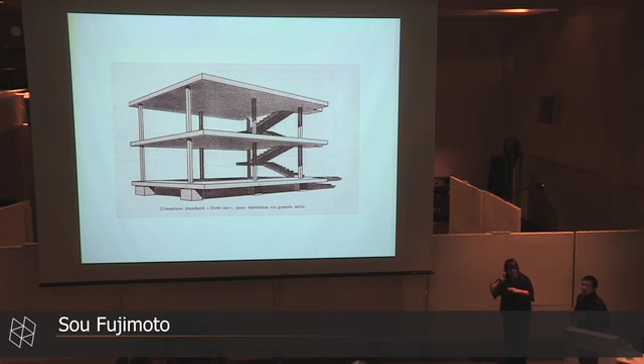And then, what is the cave? I like to say cave is a space not designed for people, so it is completely opposite. Because the cave has existed before people, it is just a natural created landscape, with no relationship with people or human body. That is a big difference.

But I think it is much more creative to live in the cave. When you enter the cave, at first you will be very embarrassed, but then gradually you will find some kind of bigger space, cozy space, this kind of landscape, and you will find your comfortable space, or a place to put things, or somewhere to sit. Gradually you will have a nice relationship between your body and the space.

It's really a creative thing to find a space or get inspiration from the landscape and innovate the function in it. So I think the nest is, in a sense, not innocent. The cave is more innocent. If you are in the cave, you will find a new relationship between the space and your body, and that is really exciting.

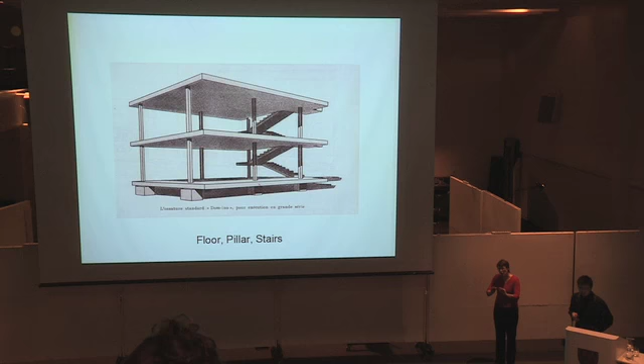On the contrary, in this project, you can see, for example, this is like a floor, but other people come and say this is not the floor, this is a bench, or this is stairs, or this is a chair, a table, something like that. So you cannot say definitively what it is or what it is not. I mean, the meanings of all the slabs are melting together to create some blurring. And then the meaning, if you react to this landscape, the meaning comes. And then other people come, and a different meaning comes.

So no clear definitions, no clear divisions, but these blurring landscape-like things. The only thing we can see is when we react to the space, then some specific functions or things emerge. So everything depends on the relationship between the space and the body. It's clearly different from the pre-defining system of modern architecture—it's a post-defining or no-defining approach. Such a contrast between this project and modern architecture.

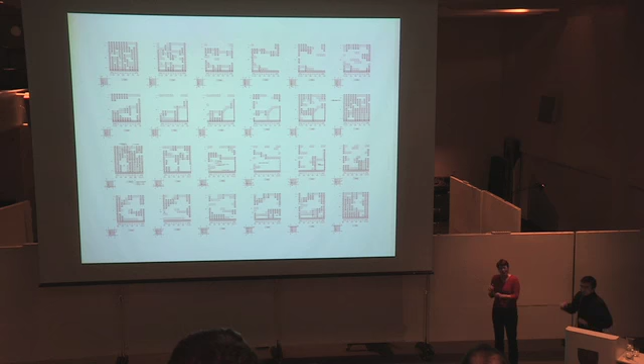But of course, we had to draw many drawings to realize this house. This is about a 4.2 by 4.2 meter house, but we had to draw 12 sections and another 12 sections and 12 plans. It's kind of like a high-rise building, but really small.

And the tricky chairs—you can use the whole space, or not even the space, but the steps, the areas, according to your feelings, or according to how many people you have: alone, with 2 or 3, or much more.

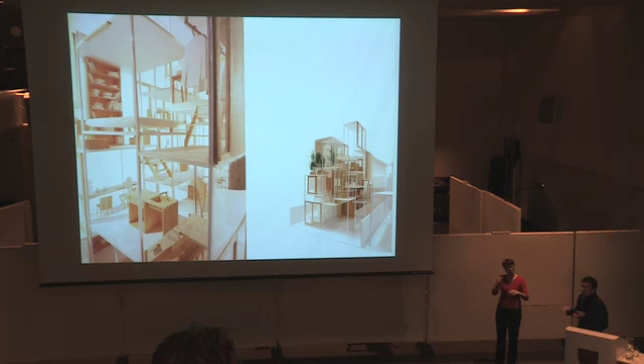So each space is not completely divided—you can sit on it to join the next space, or you can feel the whole space as one room, but at the same time, each furniture-like slab or floor is your own room. So you have many, many rooms, but at the same time, only one room.

We made many, many models. This looks like a huge house, but it's only one house. You will see, of course this is furniture, but this is a slab, and this is another slab. This is furniture. So here, the furniture and the architecture are now melting together.

Of course, you can use the chairs or sofas, but at the same time, you can use the slabs, the edge of the slabs, as the benches or sofas, or something like that.

The client really liked this house, but at the first meeting he said he and his wife are living like nomads in his house. So I got inspiration, of course, from Toyo Ito's Nomad House, but I thought I could make some kind of nomadic house, living like a nomad within a small house. So we can provide many different areas, many different relationships, and they can select their areas as they like, depending on their feelings or the situation.

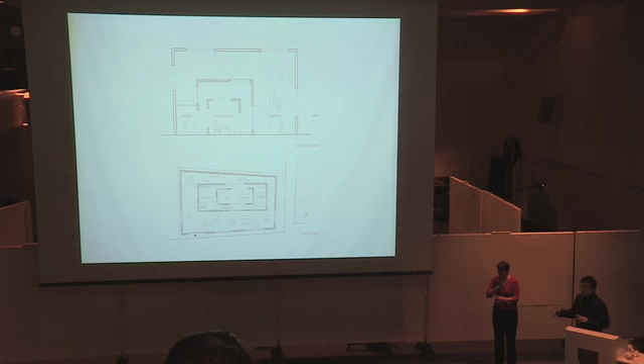And this is the size of the site. So it's a kind of an inverse of thinking or planning to make a huge box on the site, or to make a house, but including that house and garden, another box, another big box is covering everything.

Then it is realized. You can see the surroundings is the usual Japanese typical housing area with 2-story houses, and these houses are not so old, maybe 20 years old or something like that. So it is really a strange urbanscape in Japan.

And then this is my house. It looks so strange in these surroundings. But I like to say the surroundings is so strange, because it is, how to say, no design, but just usual houses. But I have to say, of course, this house looks very big, but not just a huge disturbing house from the street.

This big box is of course very big, but it has many, many openings. And the inside of this big box is outside. Then, as a result, you can see through this house to the skies behind, or you can see through this house to the neighbor's house behind. So it is a kind of translucent, or semi-transparent house or existence. So it is very strange because this wall is made by concrete, so it's very heavy, but at the same time it has some kind of transparency.

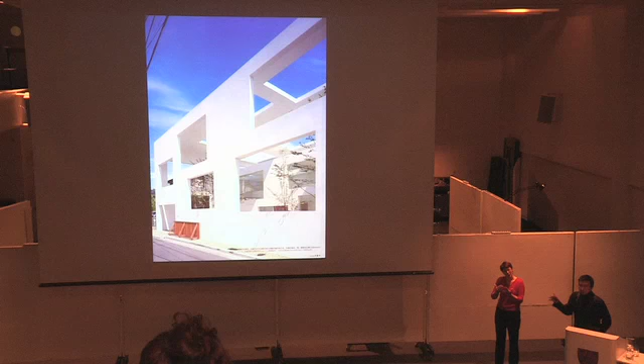And inside we have many trees, so it is a new existence in this area, in this city. And inside of this big box, you will see some covering, and then it has no glass, so openness and protected feelings are existing together.

And this is a view from the small box. You can see this is a small box, and a middle box, and a big box, and the sky. And sometimes when the cloud is coming, then much bigger something is covering you. So these 3 layers of openings, the 3 layers of the box, could create some kind of strange distance of the house, or strange expanding feelings of the house.

You can see 4 skies above, and in the real situation, you can see much more, many skies. So you can feel so much open feelings. But at the same time, 3 boxes are protecting you, so well-protected feelings.

Openness and well-protected feelings are existing together. And I think that kind of openness and protected feelings is the really fundamental element of the house. House is designed to protect outside, but at the same time you like to feel such kind of openness. So how to create such kind of a coexistence of the openness and protected feelings is the fundamental theme of house, I think. And this is designed for such kind of really fundamental aspects, and to create some kind of layers or depths of the space.

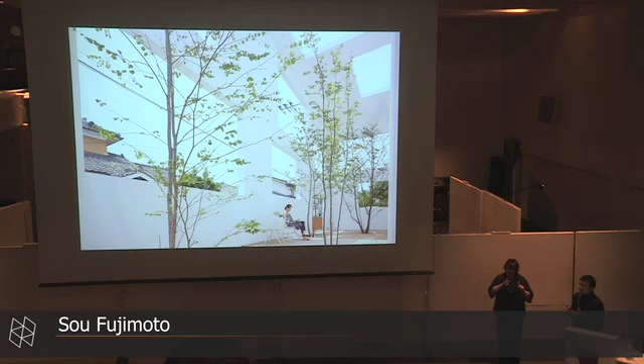Fortunately, in Japan, we have a nice tradition to admire emptiness. So not wasting, but paying a lot of money for emptiness is so nice. And of course, that means emptiness has such kind of richness inside.

And of course, we have a tradition of the in-between sense of space—you know, the Engawa space, in-between area, inside and outside, but not inside, not outside, but in-between space. So Japanese traditional architecture has such kind of empty feelings and in-between feelings. So I translated such kind of nice, very important traditions into more contemporary architecture.

I think that is why this area is really comfortable, because this area is outside, but well covered by this roof and walls, so nicely protected, comfortable feelings.

And then you can select this outside, inside area, or more inside area, or more and more deep inside area, depending on your feelings, or depending on the seasons, time, or the situation. So providing varieties of space for people to select is another aspect of the concept of the cave, I think. So this is not like a cave, but it is an open cave-like space.

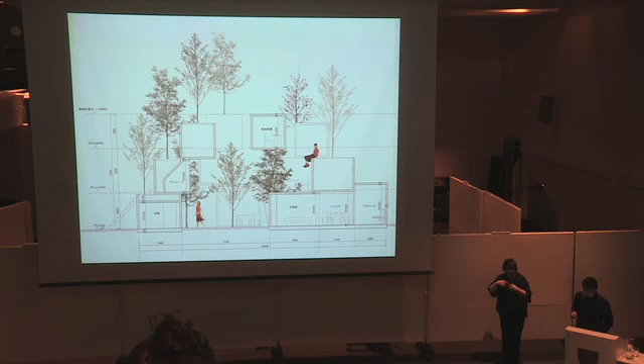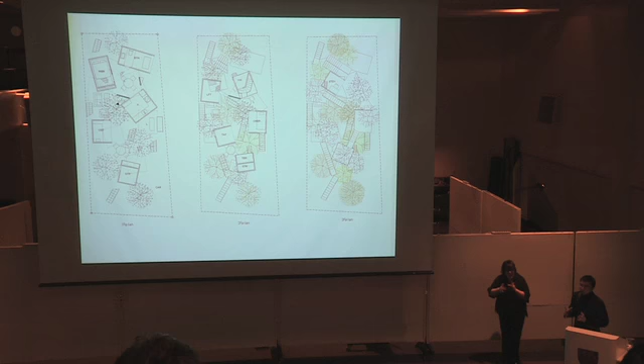This plan has really random things, and this random layout is one of my pursuing themes—to create no straight rules, but create the space only by local relationships. Each element, box, tree, or space in between, has its own networking-like relationships. It's not necessary to have one big spine or one big flat slab. Instead, more small pieces, networking, then creating new order, I hope. So I tried these kinds of things.

You can see how this box is small compared to the size of the people. And the trees above—this is autumn, so the colors of the leaves are changing. In summertime, the green grows more, so the boxes are now vanishing, disappearing, and the trees become the main part.

From above, there are many, many stairs. We put many stairs so you can, for example, go up from here, come inside this box, go down by ladder, and then go out from a different entrance. So you can select various routes to go up and down and experience inside and outside, outside and inside. This networking of experience of each box and the outer area is the main part of this house. So the size of the house is really small, but the experience is, in a sense, an endless chain of things.

Here I can say a little bit of conceptual things. I was talking about small pieces, relationships, or the networking order of relationships of small pieces. And I'd like to explain the contrast, the good contrast, between modern architecture and this new order.

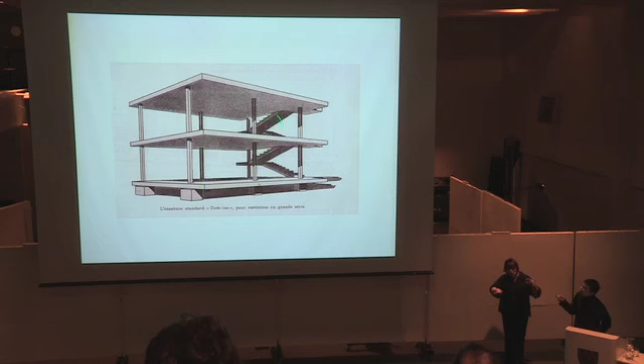These lines are the grid system of modern architecture. And then Mies van der Rohe—what he did was really shocking, inspiring. I'd like to explain: what he did was vanish all the notes. So Mies says architecture is not about every kind of note, but about giving form to this underlying, underflowing time, or undergoing space itself.

So Mies says this is an extreme music, or just universal space—nothing is the extreme architecture. And that is really, really shocking, because after this, if we put something to create architecture, it's just funny playing on the Mies background. So we could not beat Mies anymore. If you play on it, you're just playing on it.

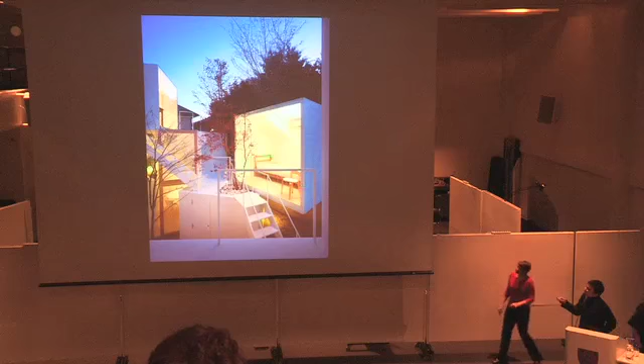Oh sorry, and you will see how the room is small compared to this furniture. But the whole one wall is a window, so there's a nice, close relationship between the garden, outside, and inside.

Okay, this is the last project, my new library. This is a library for an Art University. You remember Toyo Ito designed a library for Tama Art University with many, many arches. Tama Art University and this Musashino Art University are both in Tokyo, and these two are very, very good rivals.

So after Toyo Ito's library, Musashino University thought, we have to make a library too. But Toyo Ito is a great master, so they thought we have to commission someone from a much younger generation. I don't know the reason, but they decided, and then they did a limited proposal competition, and finally I was selected. So it was thanks to Toyo Ito and thanks to Musashino Art University.

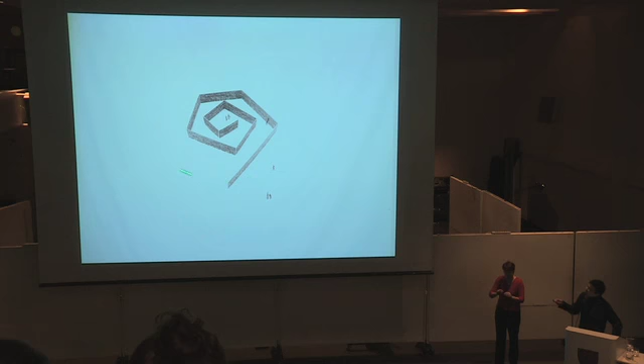And this is the study model, not exactly the final one, but the bookshelf wall is growing, including the spaces for people. Finally, it's a huge library.

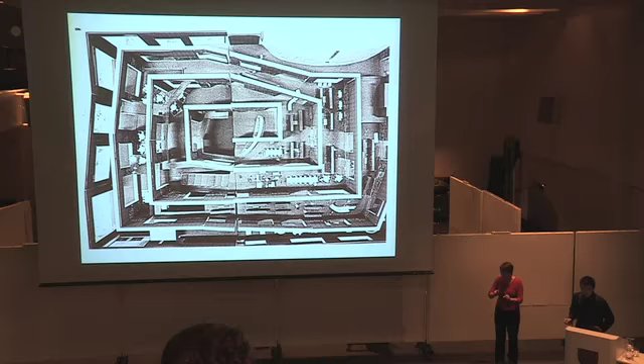And this bookshelf wall is sometimes double height, so 9 meters high or something, but it has many, many openings, so you will see these layers of bookshelves. It's a kind of endless library, and I have to say I was inspired by the Jorge Luis Borges story, The Library of Babel.

It is a kind of infinite experience of library, or library as a world. So of course, as a geometry, it is completely different from Borges' story, but I tried to create this kind of whole world-like library.

But of course, this spiral system is not just imaginary; we did deep research and discussed with the client, and finally we found two really fundamental aspects of library: one is searchability, to find the books easily, and another is scrollability.

And searchability is much easier to understand. It's the very simple principle of a library: all the books have numbers and categories, so you have to make the layout really systematically. So it is a very important thing.